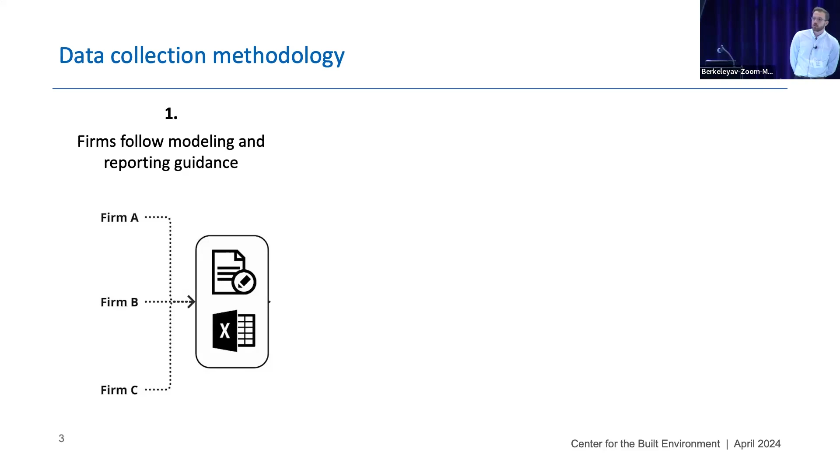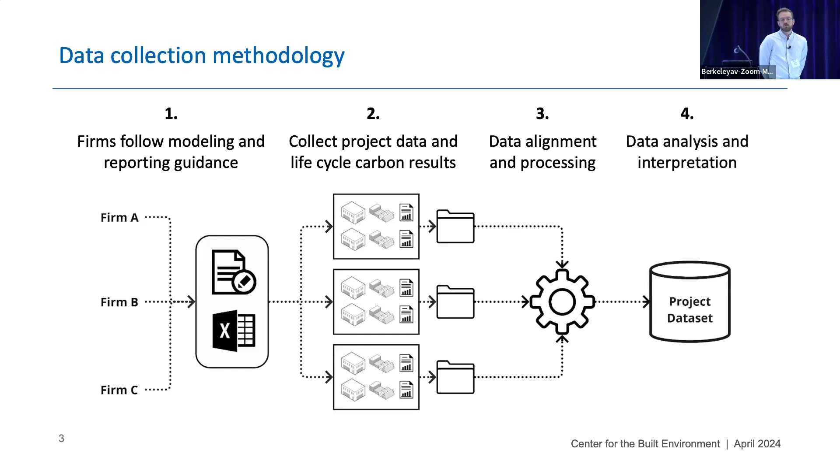So just to give you a bit more of an idea about the data collection process. Like I said, this is using industry practitioner data. The firms that we collected information from were a variety of engineering and architecture firms. They had to follow standard reporting templates and modeling parameters for what was modeled and how it was modeled, and then the outcomes of it. This data was collected along with the building attributes and characteristics by CLF, and then we did some data alignment and processing to make sure that there weren't any outliers in the data set. Finally, we arrived at the data set of 30 new construction buildings across the state of California.

To give you a bit more of an understanding of the type of buildings that we're working with, it's a variety of use types, including quite a few commercial office buildings, some multifamily, and then some buildings that are classified as other, both in terms of just other and commercial other, including some healthcare facilities, lab facilities, and a few warehouses.

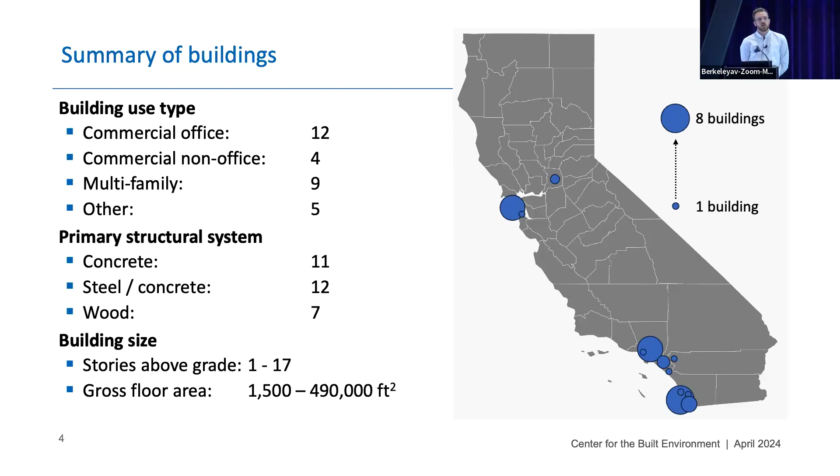The buildings had a variety of primary structural systems, from purely concrete structures to concrete and steel and timber frame, and they had a variety of sizes as well. 21 of the buildings were 5 stories or less, and 12 of the buildings were below 50,000 square feet. So the data set is skewed towards smaller building sizes rather than larger buildings. I also wanted to give you a bit of a geographic understanding of the buildings. They're centered around the main population centers in California, where new construction is predominantly being located currently.

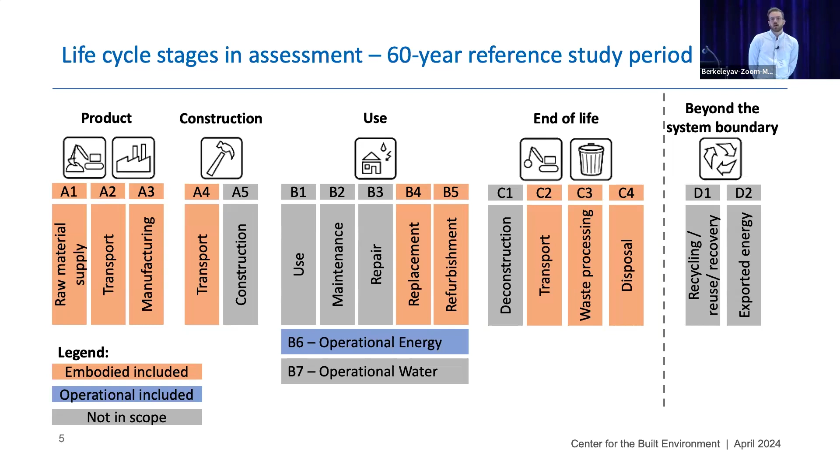So these are the life cycle stages of a building. Hopefully, we're all getting familiar with these with all the presentations I've been doing. These are the life cycle stages used to categorize the environmental impacts that happen at different stages of a building's lifespan. In orange, we have the areas of scope from the temporal aspects that are included within this study, including the product stage, which is A1 to A3, transportation, refurbishment and replacement, and some stages in end of life as well. From the operational perspective, we have modeled the operational energy use of the buildings using average annual building demand data and average annual grid carbon intensity.

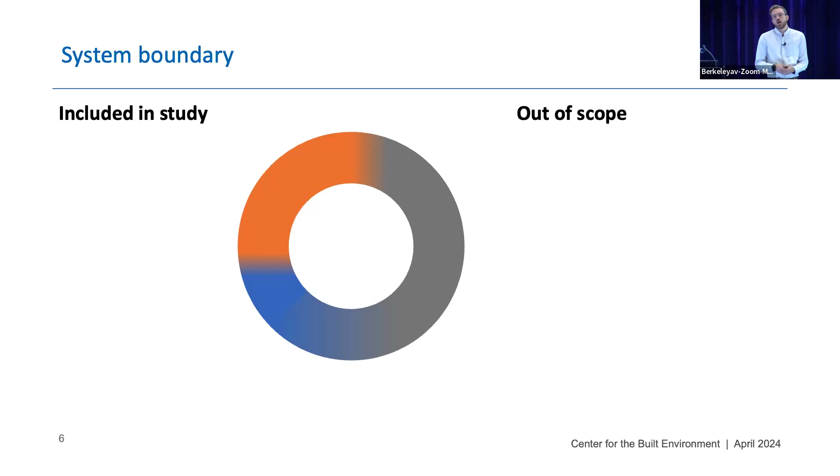So the system boundary for all life cycle assessments is one of the most crucial aspects of the study, so I'm going to take a moment on this slide to walk you through it. The system boundary basically establishes what's included in the study and what's outside of the study, and helps to allow buildings to be compared against one another and give context about what is going on in the assessment and how the assessment was done to begin with.

From the embodied side, we have the structure, enclosure, and interiors. Important to note, the first set of results I'm going to show you is only for structures and enclosure, because 19 of the 30 buildings included interiors, and we're going to be looking at the implications of expanding the scope to include interiors later on in the presentation.

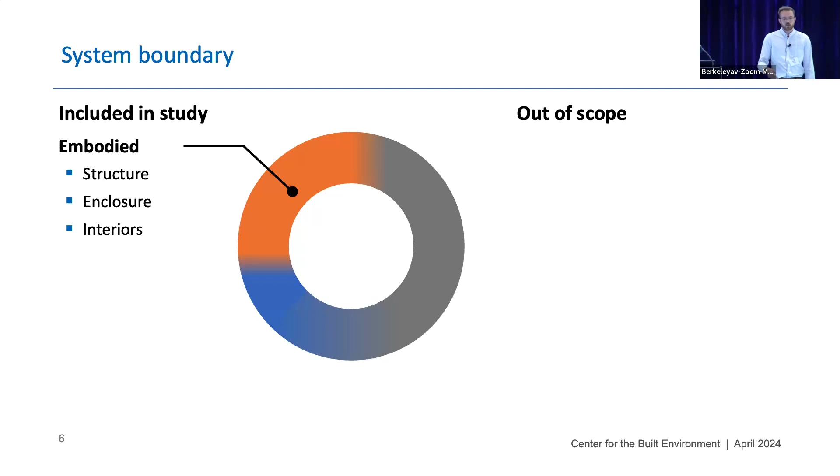From an operational perspective, we have assessed both the electricity use and the natural gas consumption of these buildings, again, based off of average annual values. Outside of the scope, this includes, from a physical aspect, the MEP systems, site work and landscaping, and FF&E.

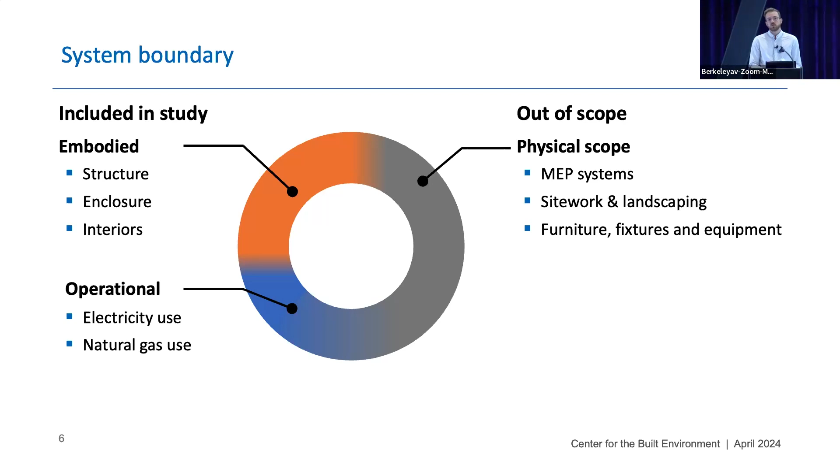Furniture, fixtures, and equipment is typically not considered within a lot of life cycle assessments for building scale assessments. However, especially for commercial offices where there's a high turnover of tenants, there's a lot of replacement and exchanges of the fittings and equipment in those spaces. So that equipment typically doesn't reach the end of its life. So it's a lot of wasted resource there, and the impacts of those building elements add up cumulatively across the full lifespan of the building.

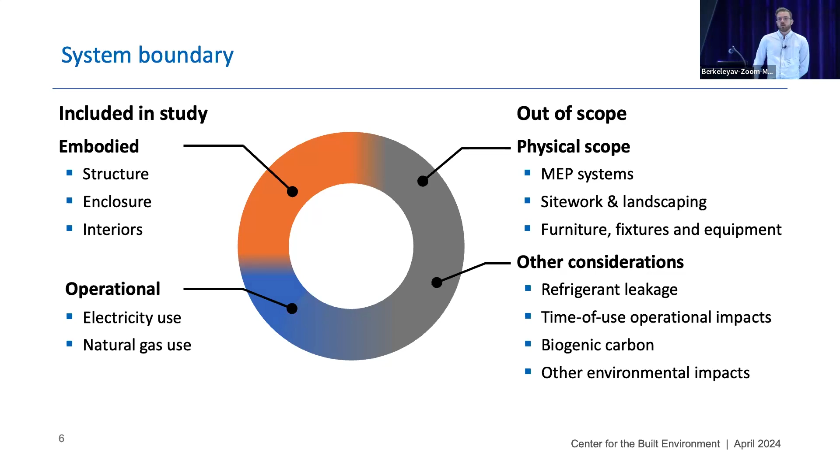And then other considerations that were not included in the study are refrigerant leakage, time of use operational impacts, the influence of biogenic carbon, which can have a significant impact and influence on the results of timber construction, as well as other environmental impacts. So this study is purely looking at global warming potential assessed over a 100-year time horizon, and it's looking at what we typically refer to as carbon. So what are the embodied and operational carbon impacts of these 30 buildings?

The data set is quite varied. There's a lot of variety going on in this data set. Again, in orange, we have the embodied carbon intensity. The values reported here are normalized by building area to allow for buildings of different sizes to be compared to one another, and they're reported in kilograms of carbon dioxide equivalents per meter squared. So the buildings have been categorized based off of the generic building typologies that we've assigned for this study, and then each bar is assigned with one building.

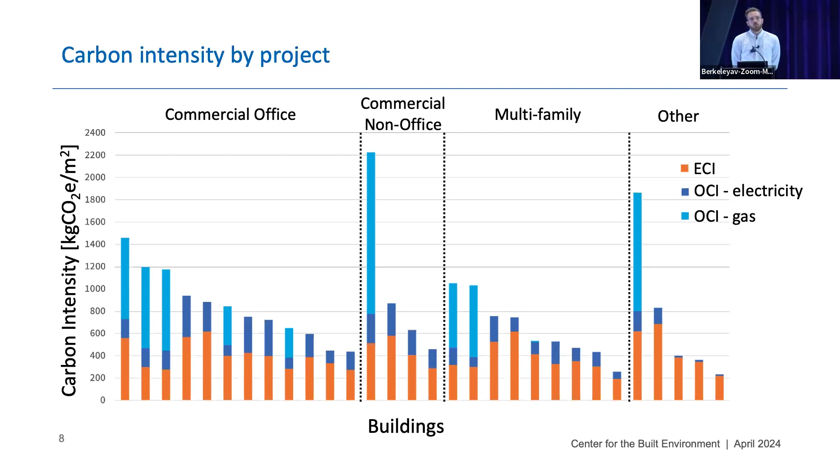So in orange, we have the embodied carbon intensity of the structure and enclosure. Dark blue is the operational carbon intensity from electricity use, and light blue is the operational carbon intensity from natural gas consumption. A few outliers in this study. On the right-hand side of the graph, there are 3 buildings that are basically ultra-low warehouse storage facilities, which is why you see barely any operational impact for those buildings. And then the large commercial non-office is a lab facility with very high energy loads that were not able to be electrified compared to other buildings that can undergo further electrification.

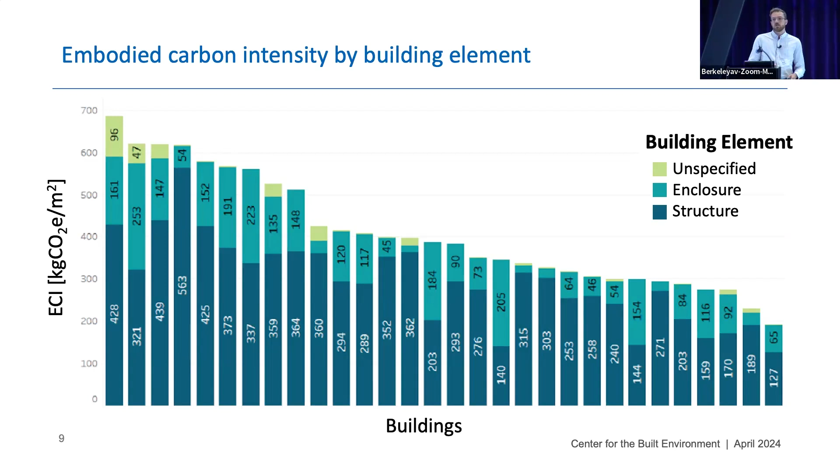Looking more specifically at the embodied carbon impacts by building element, this is again structure and enclosure, and then some elements that are not classified by building typology. And this is reported by the CSI building typology. Overall, the structure is typically larger than the enclosure. This is pretty standard across many other life cycle assessment studies and whole life carbon assessment studies of buildings, which is great. It's a nice sense check to show that the results we're getting from industry practitioners across California are aligned with what we're seeing throughout Europe and elsewhere in the world.

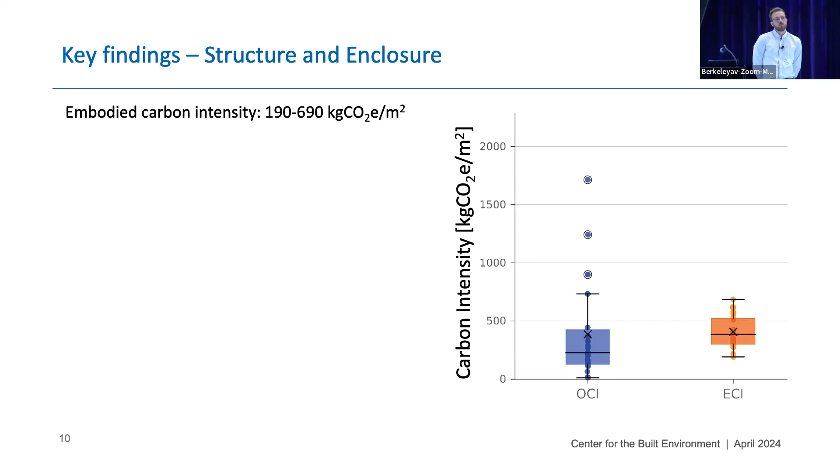The box plot on the right is showing you again the range of operational carbon intensity compared to the embodied carbon intensity of the buildings. The embodied carbon intensity ranged from about 190 to 690 kilograms of CO2 equivalent per meter squared. A1 to A3 for the structure and enclosure was the largest. This is associated with the product stage or upfront embodied carbon impacts. So this is the impact of producing the materials before they get shipped to site and installed during the construction stage of the building.

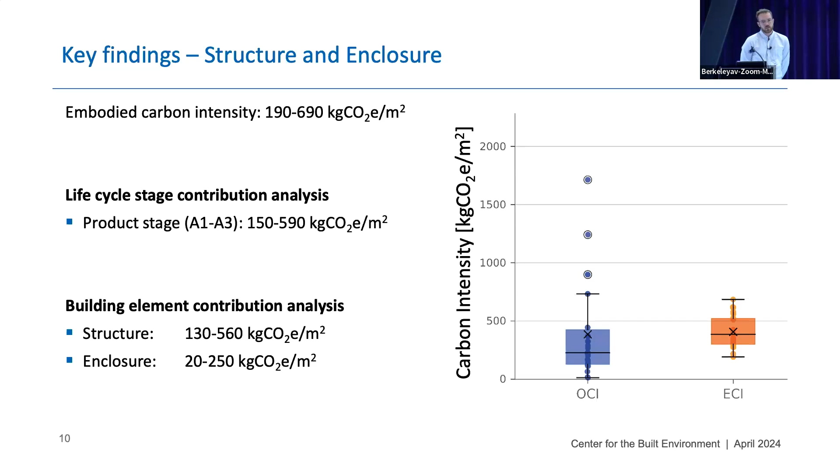And then again, the structure ranged from about 130 to 560 kilograms of CO2 equivalent, with the enclosures ranging from about 20 to 250 kilograms of CO2 equivalent. So again, these values are only looking at the embodied impacts of structure and enclosure.

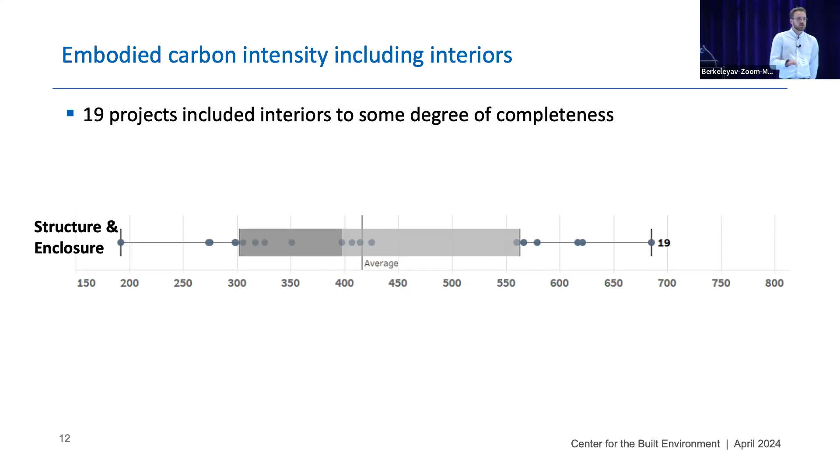So what about interiors? We had 19 buildings that reported the embodied impacts of interiors to some degree of completeness. So here we have split out the embodied impacts of interiors from the embodied impacts of structure and enclosures. The first box plot is showing the embodied carbon intensity of these 19 buildings, just looking at the structure and enclosure. Whereas when we add in interiors, we're seeing an overall shift, an increase of the embodied carbon intensity of these buildings by 65 kilograms of CO2 equivalent per meter squared on average, which equates to about an 18% increase in embodied carbon intensity when compared to the structure and enclosure alone.

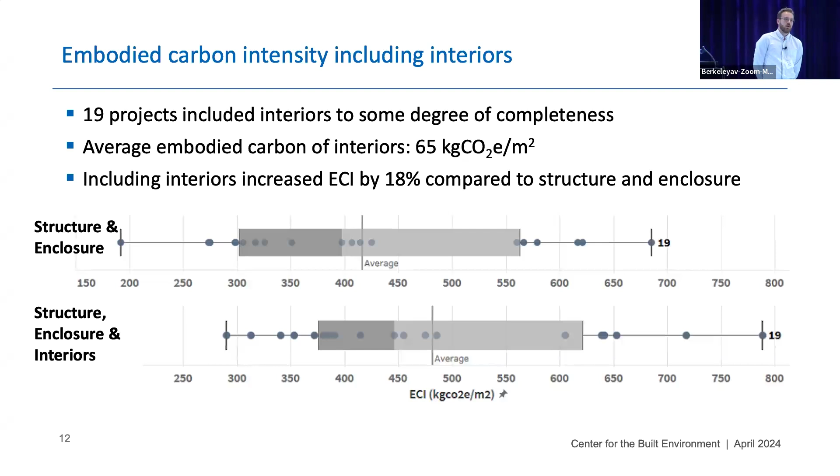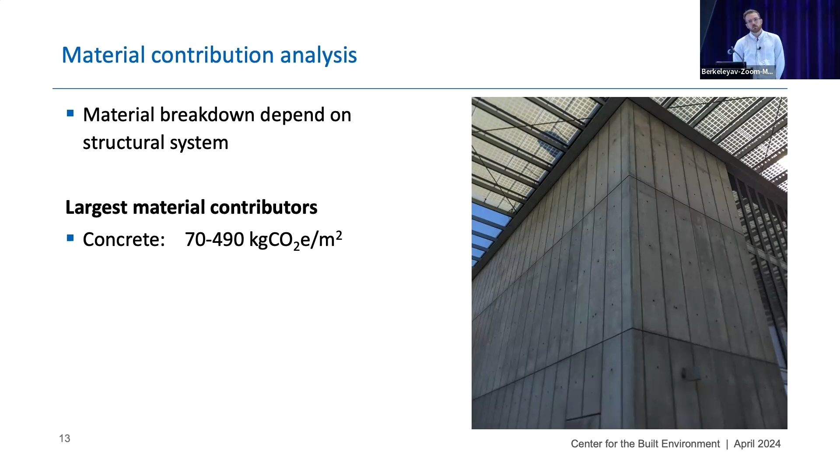So looking at the buildings overall from a material contribution analysis, the material breakdown really depended on the structural type or structural system that was used in these buildings. Overall, concrete was the largest contributing factor, typically associated with the structural system of the buildings, ranging from 70 to 490 kilograms of CO2 equivalent. And then metals was typically the second largest material contributor to embodied carbon intensity.

So what's important to note is that building scale life cycle assessment is a puzzle, and we still really don't know the full picture of what's going on. So this study is a great place for showing and describing where we're at in industry, but it's also really good at highlighting what we need to do to get to the point where we can say, this is the environmental impact of a full building across its full lifespan.

So what we've done is we've categorized the next steps in future work and areas that we need to address in life cycle assessment for the building industry into three main categories: methodological considerations, physical scope, which is the building elements, and then temporal scope, which is the different stages of the building's lifespan. So in terms of methodology, we need to do a lot more research into how biogenic carbon content is calculated, quantified, and reported in building scale LCAs.

We need to incorporate time of use factors into our modeling assessments and reporting practices, and also look at both short-term and long-term climate impacts of the design decisions that we're using in the building industry. Certain ideas and practices are having a longer-term impact over time, whereas other strategies are having a more immediate short-term impact right now.

In terms of physical scope, renewables and energy storage are a hot topic that are being incorporated into a lot of building elements. However, it would be ill-advised to assess and report the benefits of using these systems from an operational perspective without also quantifying and accounting for the embodied impacts of these systems. We're seeing in certain cases, the embodied impacts outweigh the benefits from the operational perspective.

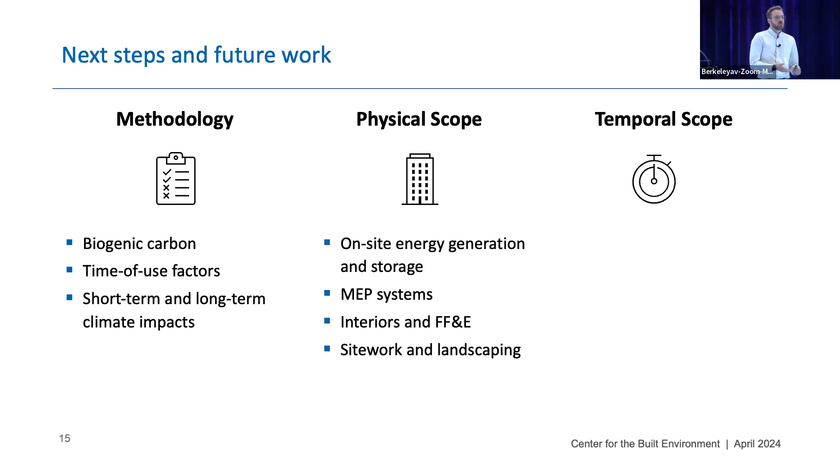And then site work and landscaping. A lot of the time in urban areas, this isn't too much of an issue because the building typically consumes a lot of the site. However, in other areas and more infrastructure projects, the site work and landscaping, which includes grading, excavation, and groundwork, that can be quite impactful and intensive.

In terms of temporal scope, we heard from Paul earlier today that refrigerant leakage can be quite impactful. So we're doing some work behind the scenes to hopefully incorporate that into some of these building scale assessments. Maintenance, repair, and refurbishment, which is life cycle stages B2, B3, and B5. They're often typically considered to certain degrees, and very broad brushstroked assumptions are being used.

So we need to improve how those are considered, as well as construction and deconstruction, as well as module D, which is both the impacts and perceived benefits from exporting energy from a building to a grid network, as well as any perceived benefits from reusing materials and recycling materials.

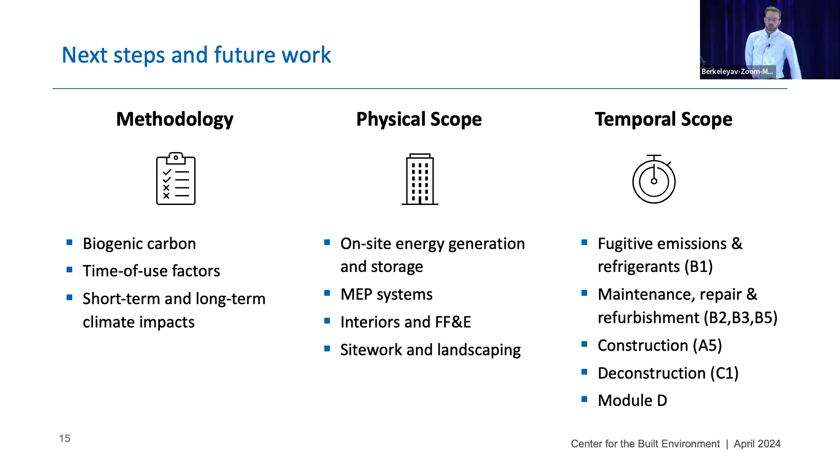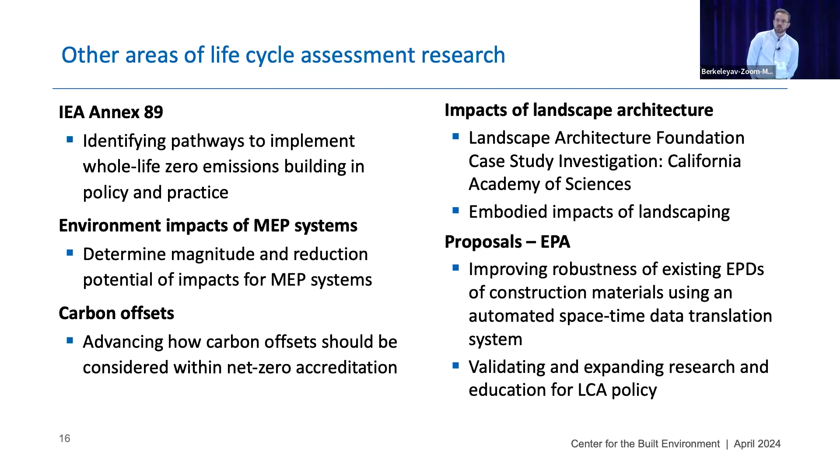So this is one area of work alongside all these other areas of work that I've been working on for the past 6 months, including some proposals that we're still waiting to hear back on. I'm going to be running a breakout session today on improving the completeness and comparability of LCA studies in buildings. However, please feel free to talk to me about any and all things life cycle assessments in buildings.